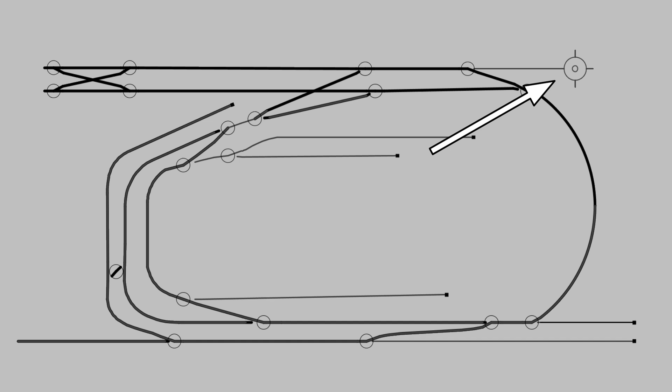There is a turntable, a bit of a goods yard here, and the opportunity to run trains round in various ways, but it's a bit limited on this section here where it's just a single track. So that's the layout as it stands.

Now this shows all the breaks that I'm going to put in to make all the blocks. The node it refers to is the MERG node, and in fact node 300 is connected already, and I've got the lower section of this layout working. The top section, which is much more complicated, I've yet to do, and so that will be a bit of a learning curve as I make this video.

Just to complete the picture, I'll add the point numbers that we allocated to CBUS, and you remember we used a couple of those down at the bottom here, points 13 and 14, to animate in part 2 of this series. And I'll also put in here the block numbers that I've allocated.

Now blocks can be any length you like, but I quite like to have quite a number of shorter blocks so I can actually see where the train is. If you have long blocks, then the block simply highlights to say that the train's on there somewhere. I like to see it swapping and changing as the train moves along.

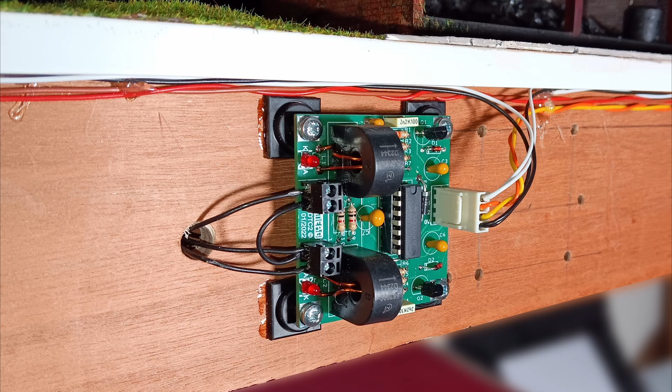Now this is a MERG DTC2. DTC2 because it's got 2 track sensors on it. Now when you're connecting to the track, you only need to break one side, one rail, and make sure that's always the same rail, just for convenience.

In my case, I've used the rail that's nearest the centre of the room, put a cut in them, and then filled that cut with some sort of filler just to prevent anything else getting in the way and remaking the contact. So either side of that break will come to a track sensor.

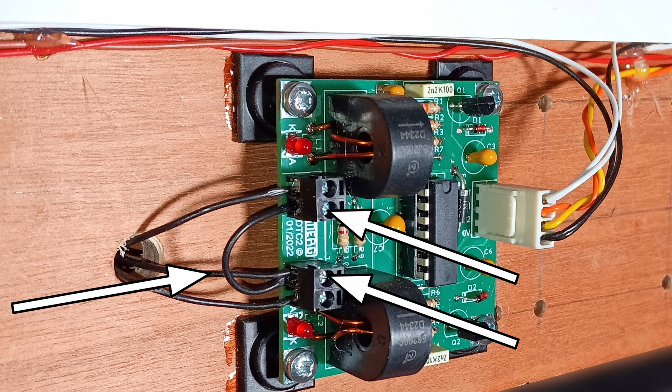Now you can see here that these two are connected together because that's the power coming into the track from the DCC controller. It then passes through these 2 rather large coils to 2 separate blocks on the layout.

So what happens in the sensor is that as soon as it senses any current drawn by a locomotive or a coach or a wagon or something else that's on the track, then that current passes through this coil. That's sensed by the chip and it produces an output on one of these pins.

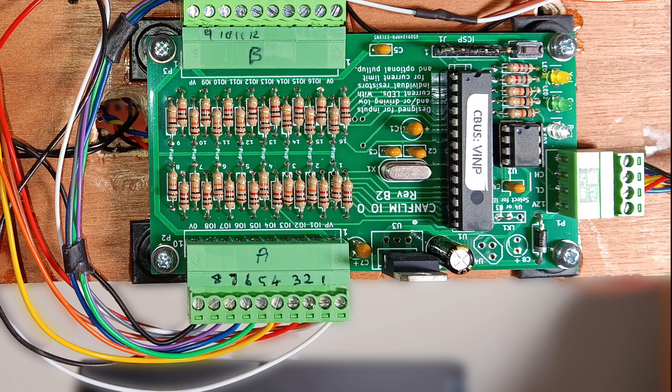Now these 4 pins at the back here, the outer 2 are for 5 volts power and the inner 2 are the digital on or off outputs from the sensors. So the binary digital outputs from those 2 sensors now need to go to something that will generate a code to go along to the CBUS when something appears on the track. The board I've chosen to do that with is a CAN-VINP board.

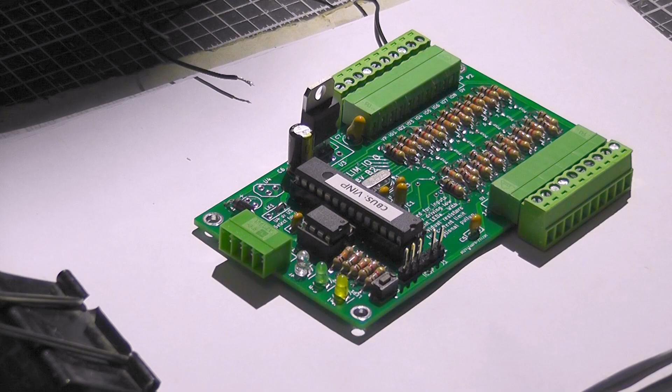It has 16 inputs, but I'm going to use just 8 of those for sensing the blocks on the railway, because I'm going to use the other half of the CAN-VINP for other types of sensors. Right, so first of all, what you see here is the CAN-V board, and what I've done is just connect a piece of wire to the 0 volts end of the connector, and now all I'm going to do is plug it into the CBUS.

Now as you can see there, we've got a power LED, which in this case is bright blue, and a yellow LED which says it's in FLiM mode. This particular PCB doesn't work in SLiM, so that's fine by me. I need it in FLiM mode anyway. So the next thing to do is to produce some events. Now what you can see on my computer screen, this is actually the second one of these I've done. The first one was a real experiment. This one is hopefully going to work.

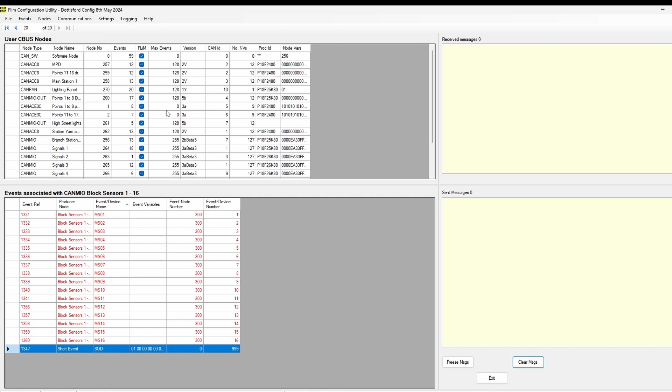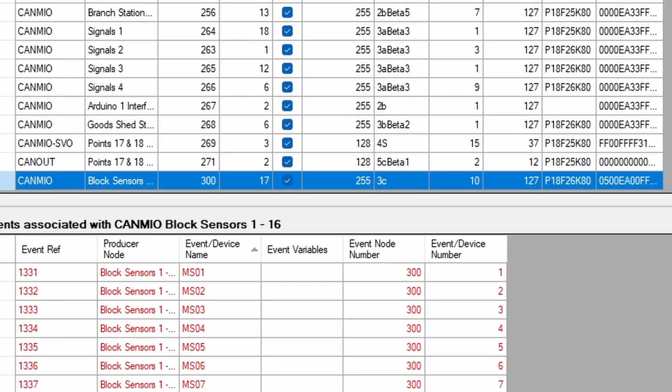So if you look at this section here in the top left, you'll see that I've got one module here which is marked block sensors. It's showing as a CAN-MIO, but it's actually a CAN-MIO in the guise of a CAN-V-INP input module. So first thing to do, now I've plugged it in, is to make sure that the FCU finds it. So we press the little button, hold it for a while,

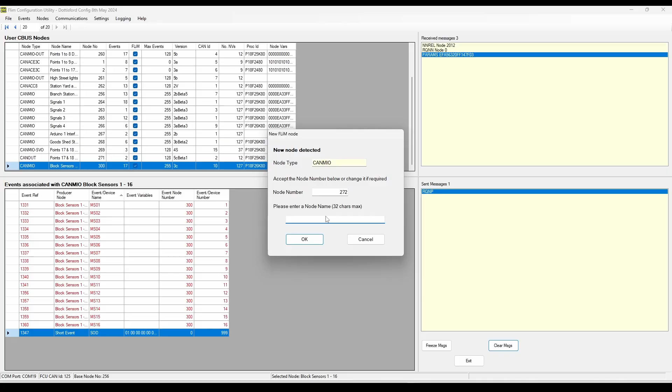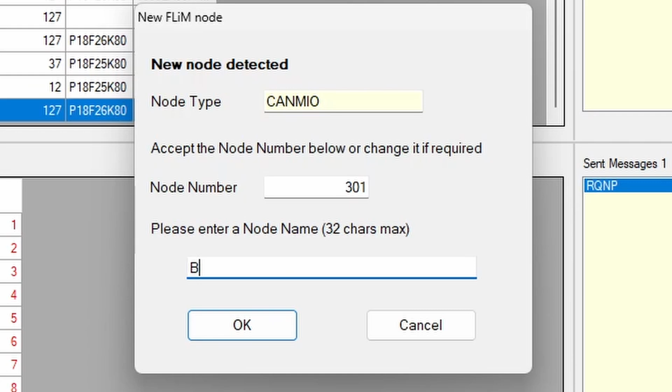okay, so I've now turned the FLiM off. As you can see, the yellow LED's gone out. Hold my finger on the button till it comes back in again. There it is. And now it's coming up and asking me for a node number. Now, as I say, this is the second one I've done. The first one I called node 300, so this one I'm going to call 301. So I'll type in 301 there, and a node name, I'll call it block sensors 2. Press OK. So now we've got showing up in here on the screen block sensors 2.

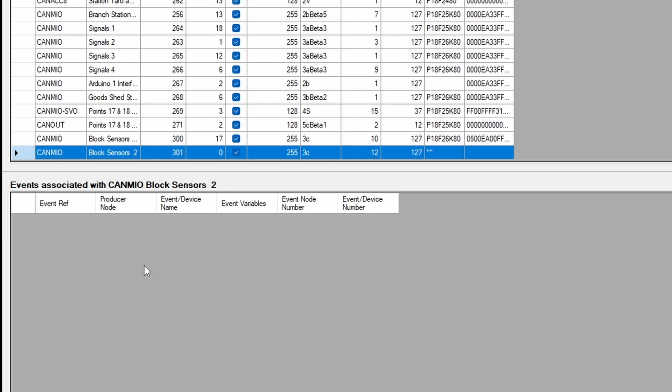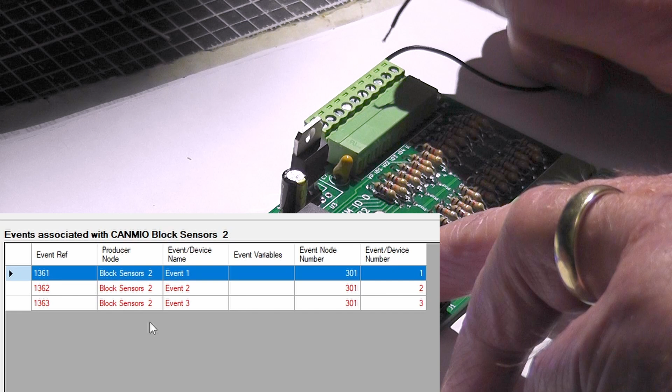Now if I click on that, there's nothing in it, there's no events. So the first thing we have to do is generate some events, and it's ever so easy with these. All you do is, with that lead I connected to 0, we then link the other end of it to the various inputs. Now on the board, input 101 is shown here, input 1, so if I short that to 0, I get an event, event 1. So all I'm going to do now is run down here and do them all. 102, 3, 4, 5, 6, 7, 8.

And then on the other connector down here, we've got 9, 10, 11, 12, 13, 14, 15, 16. So we've now got 16 events generated on this board. Next thing to do is to rename them. Since each one of those inputs is going to be connected to a MERG sensor, then I'll rename them MS1 to whatever. Now in fact, my first board did the first 16, so because of the layout of the boards and things, I'm going to start with MS20.

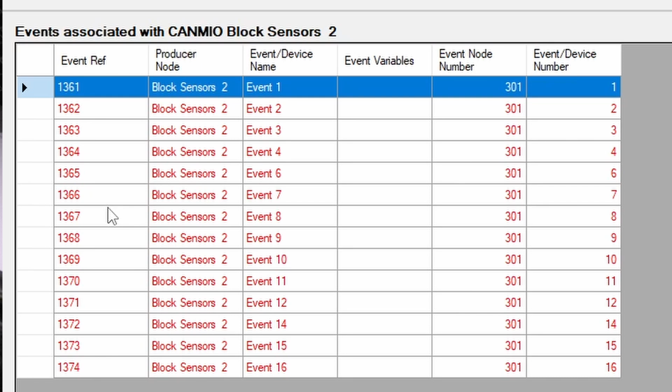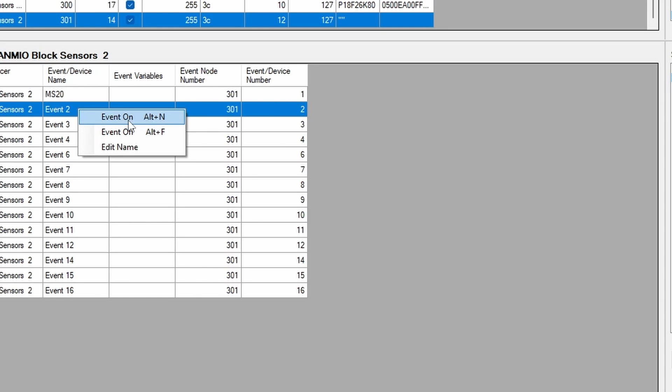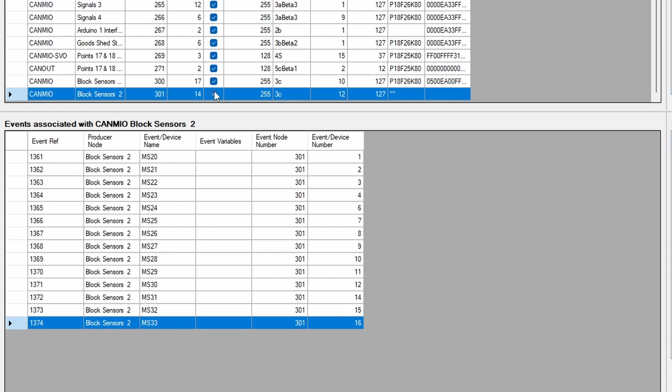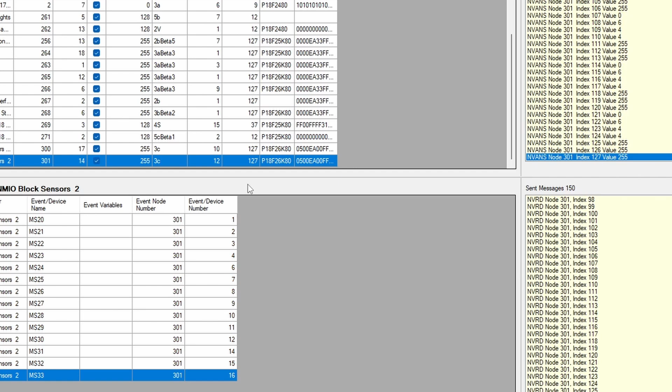So here we go then, event 1, right click on there, edit name, and we'll do it in capitals, MS20. OK. Edit name. So we've got them all named from MS20 through to MS33. What we haven't done on here yet, of course, what I should have done when I first plugged it in, was read the properties, see what it is, and also read the NVs. There we go. So now the node is a part of the layout.